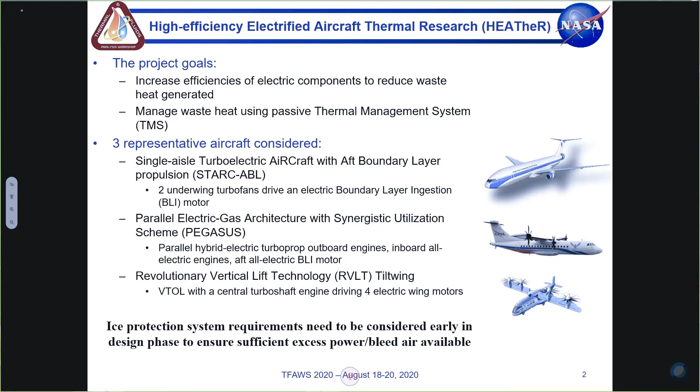Three different concept aircraft that cover different types of electric aircraft are analyzed. STARC-ABL is the single-aisle turboelectric that has two underwing turbofans that drive an aft electric boundary layer ingestion, or BLI, motor. Pegasus has two turboprop engines with parallel electric boost on the outboard locations and two all-electric inboard engines for takeoff assist, as well as an aft all-electric BLI motor. RVLT tiltwing has one centrally located turboshaft engine with four electric wing motors.

A common thread across all these aircraft is that the conventional engines are smaller and supplemented by electric engines, so there is a concern that they won't be able to support conventional ice protection systems unless the requirements for that system are included early in the design process, which is what we're doing here.

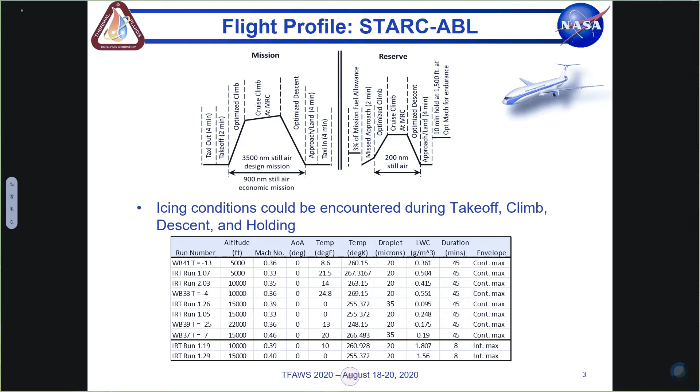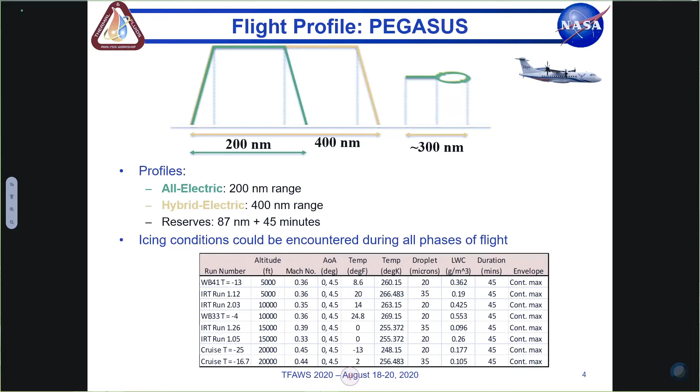The conditions that we want to analyze for icing are determined by the expected flight profiles. STARC-ABL is a single-aisle narrow body, similar to a 737 or an A320, so it has a similar flight profile. The cruise altitude is above normal icing conditions, so an analysis would be focused on takeoff, climb, descent, and holding. In this particular analysis, we focused on takeoff and climb, when the least amount of bleed air or excess power is available.

Pegasus has a flight profile similar to a regional jet that is shorter and lower in altitude than STARC-ABL. That lower altitude places the cruising altitude within typical icing conditions, so all phases of flight must be considered. But again, for this analysis, the focus is on takeoff and climb for the same reasons.

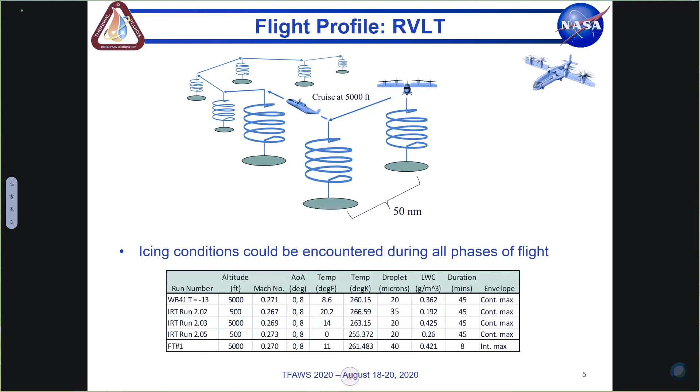RVLT is a little different. Its flight profile is designed for urban air mobility. You have several short hops at low altitude. Given that low altitude, you could encounter icing conditions during all phases of flight. The analysis for this one is a bit more challenging since both forward flight and hover mode must be considered. And on each of these slides, the icing conditions that we analyzed were listed.

So for those of you who aren't overly familiar with ice protection systems, there's two primary types currently in use on most commercial aircraft: thermopneumatic and electrothermal. Thermopneumatic uses bleed air extracted from the engine, fed through ducting, manifolds, valves, and pipes to get to the leading edge. Because of all of that, it has higher weight requirements than, say, an electrothermal system. It also has a performance penalty while the system is active due to the bleed air that's being extracted. And it's capable of transferring approximately a few kilowatts per meter span based on the information available in the literature.

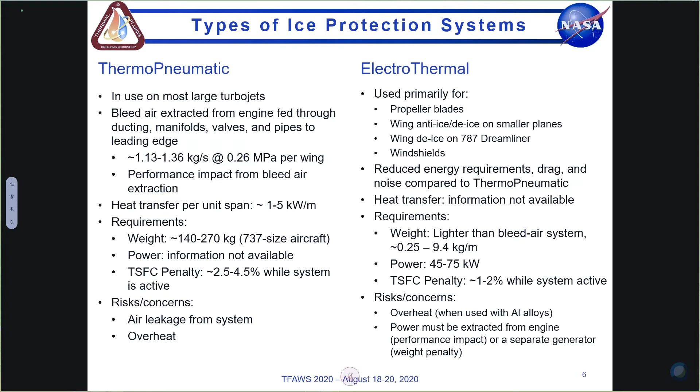The other type of system is the electrothermal system. It's used primarily for propeller blades and windshields. It's also used as a wing anti-ice or de-ice system on smaller planes, and most recently it's in use on the 787 Dreamliner as the wing de-ice system. It has reduced energy requirements, drag, and noise compared to a thermopneumatic system. Unfortunately, the heat transfer capabilities were not available in the literature, so I wasn't able to compare the heat transfer requirements to an electrothermal system for this analysis.

Additionally, types of ice protection systems can be delineated as running wet or fully evaporative, and they're pretty much what they sound like. A running wet system heats the incoming water to maintain the temperature above freezing so you get liquid over the heated section of the wing chord. The downside is that liquid water can then refreeze on the wing after the heated section, which is called runback ice. In many cases, a de-icer is required to handle the runback ice.

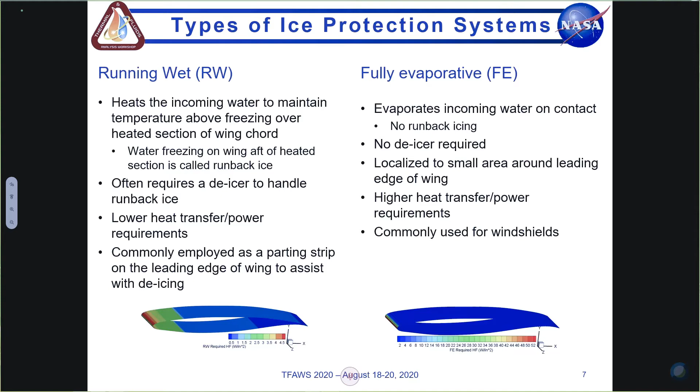I've also mentioned de-ice and anti-ice. An anti-ice system maintains the region ice-free. A de-icer, on the other hand, allows ice to build up to a certain level and then sheds it using different mechanics. And it's commonly set up to do so in a cyclical fashion to successive sections of the wing. And that reduces the total power or bleed air required.

So for the analysis, heat flux requirements were calculated using LEWICE, which is a software developed by the Glenn Research Center icing branch. For this initial analysis, as only the heat flux was of interest, a 1D steady state analysis was sufficient and a lot faster. A more refined 2D analysis is currently being performed by the icing branch using a software called ANSYS FENSAP-ICE. The maximum heat flux that's been calculated with FENSAP so far is lower than the results from LEWICE, so the LEWICE results are considered more conservative, which is useful at this stage.

Since aircraft tend to be moving more towards composites, given their strength to weight benefits, a typical aircraft carbon fiber reinforced polymer material was used for the skin in this analysis. A few scenarios were also analyzed using 6061 aluminum to understand the sensitivity to the skin material, and it was found that the heat flux requirements were approximately 3% lower, which was not considered significant at this stage of the analysis.

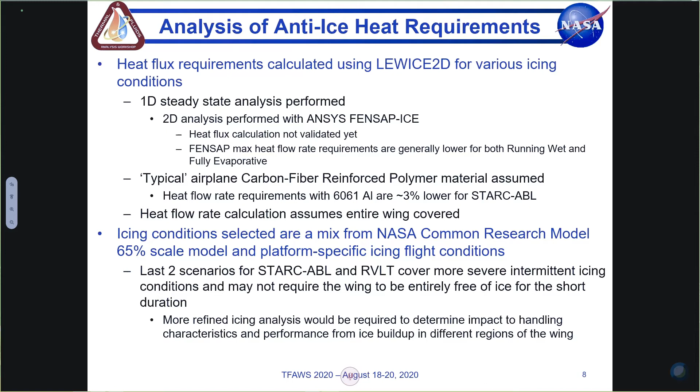The icing conditions that were selected are a mix from a NASA Common Research Model and platform-specific icing flight conditions. The last two scenarios for both STARC-ABL and RVLT cover more severe intermittent icing conditions, which may not require the wing to be entirely free of ice for the short duration. It's important because they end up having a higher heat flux requirement, which I'll get to. A more refined analysis would be required to determine the impact to the handling characteristics and performance of the aircraft from ice buildup in different regions of the wing to determine if the ice that we build up would be acceptable.

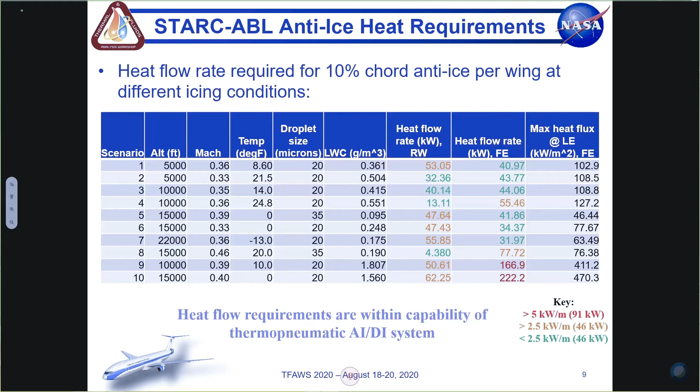The conclusion here is that the running wet system is within the capabilities of a thermopneumatic system for all the scenarios analyzed. A fully evaporative system is within the capabilities for all except the two severe intermittent cases, so we'd have to do further analysis to determine if that's acceptable or not. The last column shows the maximum heat flux at the leading edge for a fully evaporative system, and it highlights one of the reasons why fully evaporative systems may not be suitable for this application, as the heat fluxes are very high and may exceed the abilities of the material and the selected anti-ice system.

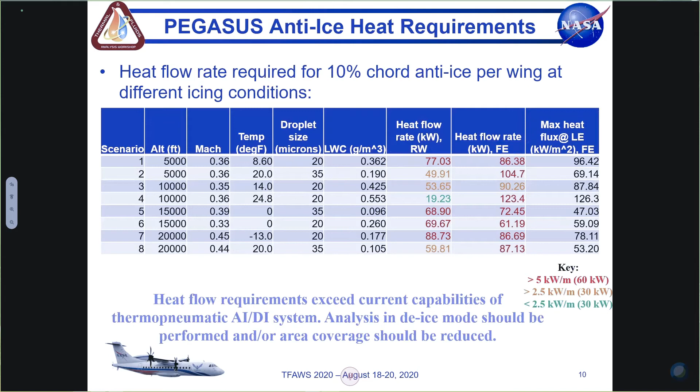Pegasus has much higher heat flux requirements, which for the most part exceed the capabilities of a thermopneumatic system. Some options we could consider would be to use the thermopneumatic system as a de-icer instead, because that has overall lower requirements since only part of the wing is heated at a time. We could also consider reducing the area covered. Less of the span covered means lower heat requirements overall. Both options would require a more refined analysis to determine the effect of ice buildup on the aerodynamics, performance, and handling characteristics of the aircraft to determine what thickness of ice would be acceptable before it has to be shed.

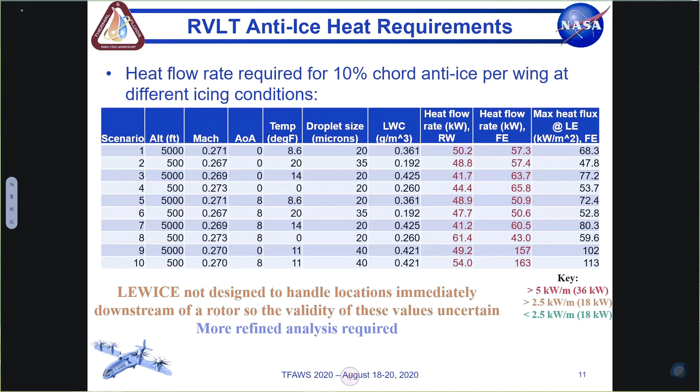For RVLT, you'll notice that everything is red. All of the scenarios we analyzed exceeded the capabilities of a thermopneumatic system. A potential cause for this is that LEWICE is not really designed to handle the complicated flows immediately downstream of a rotor, so the validity of these results is in question. A more refined analysis is in the works in FENSAP by the GRC icing branch, which would provide more realistic results. If, like with Pegasus, it still largely exceeds the capabilities of a thermopneumatic system, we have the same options to decrease the total heat flow rate.

Thinking ahead to the future, some integration considerations. The heat flux at the leading edge required for a fully evaporative system might not be achievable given material and heat transfer constraints. So it would be more likely that we'd go with a running wet system. Running wet systems, for the most part, require a de-icer to handle run-back ice. However, we'd have to do more detailed analysis to determine the effect of the run-back ice on the handling characteristics and performance to determine if we need a de-icer or not. A de-icer does add weight and power requirements compared to a fully evaporative system.

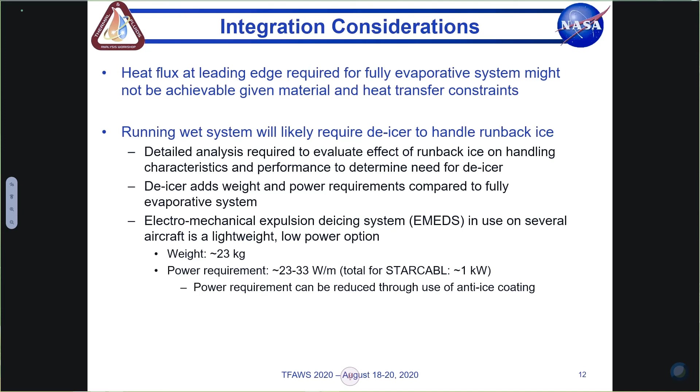One fairly recently developed system is called EMEDS, or Electromechanical Expulsion De-icing System. It's in use on several aircraft, mostly general aviation aircraft and a couple of military aircraft, but it's a lightweight and fairly low power option. So for STARC-ABL, for instance, it would take approximately a kilowatt of power and weigh 23 kilograms-ish, which is not bad compared to current thermopneumatic and electrothermal systems. And then the power requirement could potentially be reduced even further through the use of an anti-ice coating, which makes it easier to shed the ice. It doesn't prevent the ice from building up on its own.

The conclusions: heat requirements were calculated for maintaining an ice-free leading edge for all three HEATheR variant aircraft. For the most part, the heat requirements were in excess of the capabilities of a typical thermopneumatic system. Further analysis would be required to determine the heat requirements for a cyclical de-ice mode for at least Pegasus and RVLT, and it would be a good idea to do it for STARC-ABL as well to potentially reduce the overall system requirements. A more refined analysis is required for RVLT, especially since LEWICE is not designed for the wing surfaces directly aft of the rotors, so those results may not be valid.

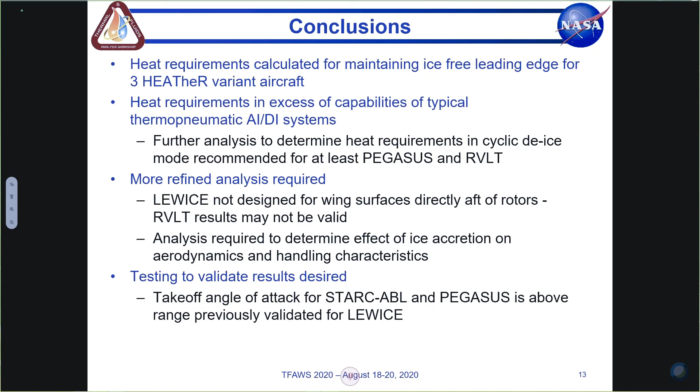And then additional analysis would be required for all three aircraft if we wanted to do a cyclical de-ice mode to determine the effect of ice accretion on the aerodynamics and handling characteristics. Such an analysis would also tell us if there are areas of the wing that we could leave uncovered without detriment. Additionally, it's desired to do some testing to validate the results because the takeoff angle of attack for STARC-ABL and Pegasus is above the range previously validated for LEWICE.

Some acknowledgements. I'd like to thank Convergent Aeronautics Solutions for funding the project. NASA Glenn Research Center icing branch has been a big help. Eric Stewart helped determine the icing conditions to analyze and has been working with FENSAP to generate the results in that software. And Bill Wright was of help getting LEWICE up and running and helping determine what form of analysis would be most suitable. Additionally, NASA Ames Research Center provided CFD analysis in support of this project.